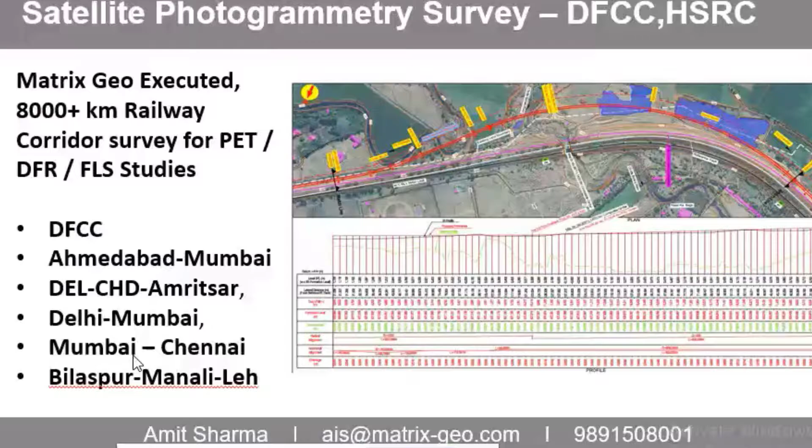And one very prestigious and very nice project, I personally like this project. This is from Bilaspur Manali Leh, in satellite photogrammetry survey. We have done almost all the corridors for high-speed railway projects, and apart from that, the Bilaspur Manali Leh project also we have done for satellite photogrammetry. So I will tell you briefly how we executed this project, because it was a prestigious and a very challenging project. It was done for Northern Railway.

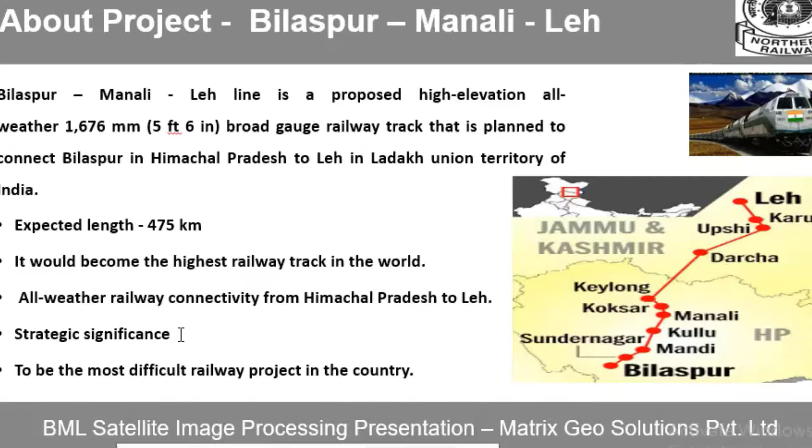About this project, the Bilaspur Manali Leh line is a proposed high elevation all-weather 1676 millimeter, 5 feet 6 inch broad gauge railway track planned to connect Bilaspur in Himachal Pradesh to Leh in Ladakh, Union Territory of India. The expected length was 475 kilometers. It would become the highest railway track in the world, with all-weather railway connectivity from Himachal Pradesh to Leh, strategic significance, and the most difficult railway project in the country.

So Bilaspur Manali Leh total area was 5,064.2 square kilometers. We processed the 480 square kilometer Upshi Leh section within only 15 days. The deliverables were orthophoto, DEM, and topographical map, and along with these outputs we gave an NSSDA report to prove the accuracy we committed and delivered, and we gave a delivery report along with that.

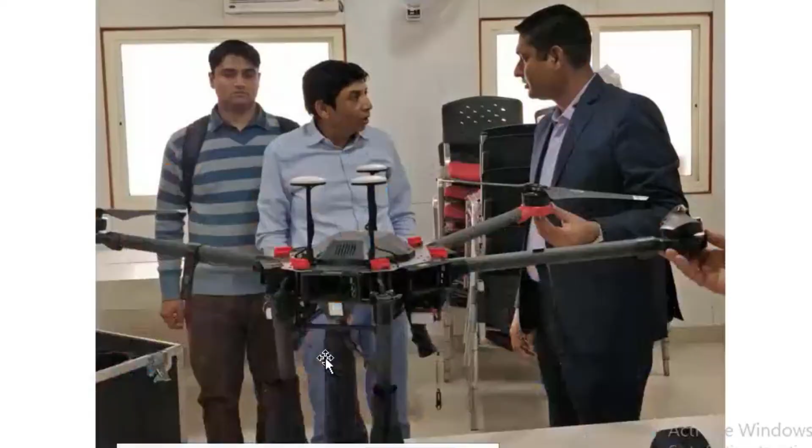So this was the project team. In this project, Northern Railway, a Turkish company, Yüksel, and Matrix Geo Solutions were part of it. They used to come to our office and were continuously monitoring the processing. This is the deputy chief engineer who was involved in that project. He was taking information on which drone we are using and how we use it. They closely monitored the processing of the data. So these were the stages: DEM creation using satellite imagery.

So the steps were, first step was input quality checking and inventory report preparation, in which we check the satellite imageries, whether they are fine or not. Do they have any cloud cover?

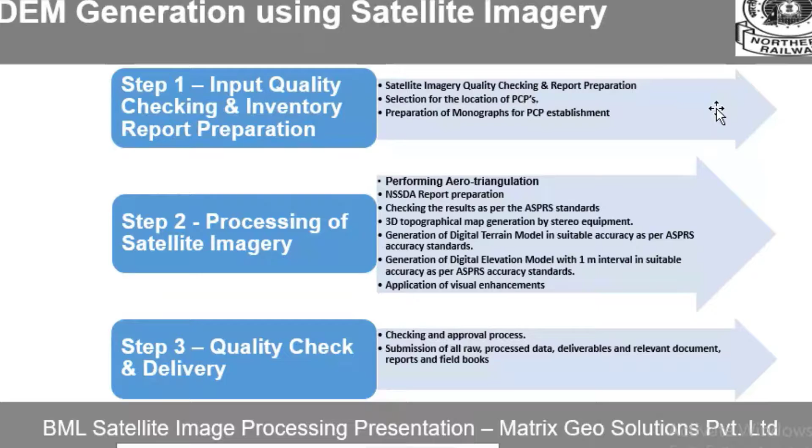So first input reception, that is receiving of image, then conversion of those images from TIL using IMD files provided along the images. Following parameters are checked: GSD and off nadir angle, type of satellite image, because there are various types of satellite images. The image required for this particular project was WorldView 2 and WorldView 3 image. So we need to check whether the images delivered to us are the same or not.

Then the time and date of images.

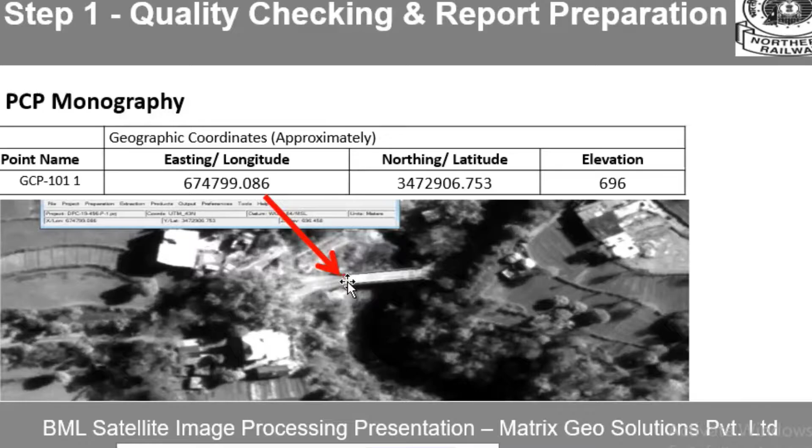Now, what is aerial triangulation? Aerial triangulation represents the mathematical process of establishing precise and accurate relationship between individual image and ground.

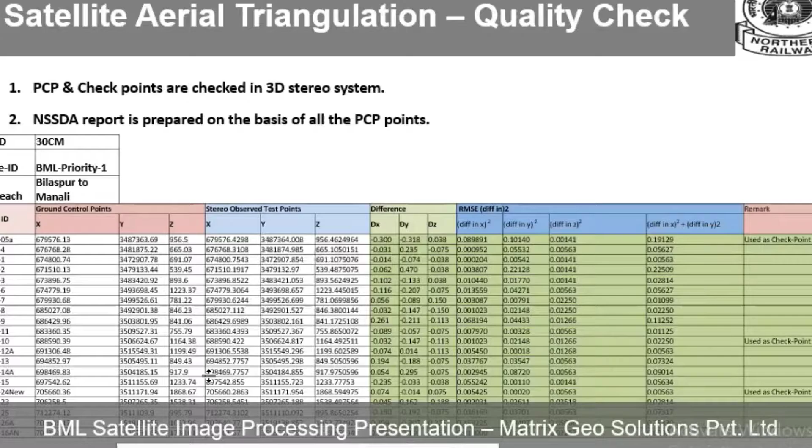This is a kind of a quality check NSSDA report which we prepare and give to client to show that the accuracy we committed, we are giving that accuracy only. This is also a NSSDA report.

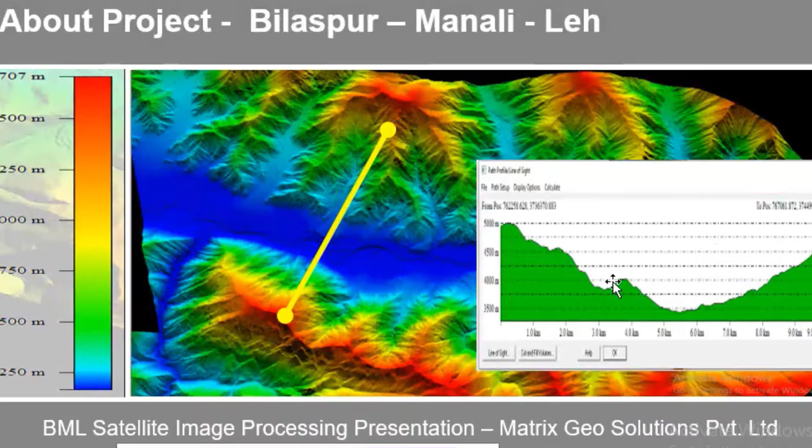नाउ डिजिटल टेरेन मॉडल का क्वालिटी चेक कैसे होता है? Principal control point and checkpoints values are compared with DTM points and reports are prepared. Manual and tool-based checks were performed to ensure accuracy of DTM as per specification. Quality statistics report in comparison to check and ground control points available. Manual check for accuracy and edge matching is done. This is the quality check report of digital elevation model.

Now this is orthophoto, the one which I told you that this is one of the major benefits of modern survey technology. You have in your background the image of your site, and that image is not just an image, it is a scaled map जो कि आप measure कर सकते हो in X and Y. You cannot measure the Z coordinate, the elevation from these images, but X and Y को बहुत ही precisely within

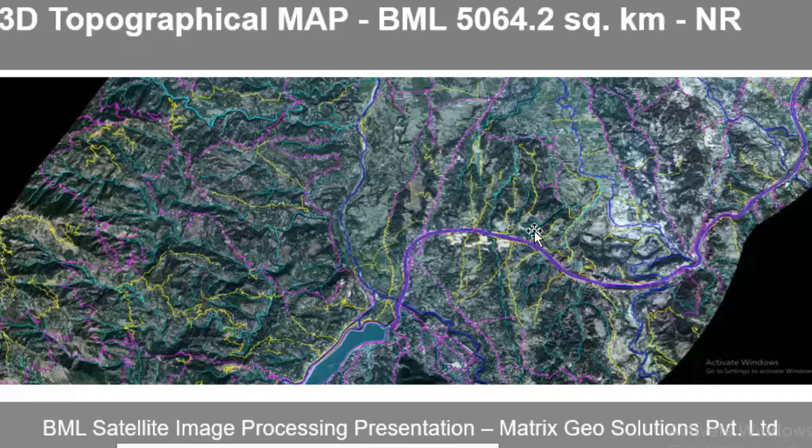The next thing is drone, which is widely used in railways these days. Now what is drone actually? It is an unmanned aerial vehicle which is commonly known as drone. It's a flying robot. It can carry camera, sensor, equipments, goods, humans as payload. It can be manual or software controlled.

Now coming to DGPS. DGPS is an integral part of modern survey technology which helps to achieve better accuracy. So DGPS is differential global positioning system. It is an enhancement to global positioning system. Provides improved location accuracy to 1 to 3 centimeter, whereas normal GPS provides 5 to 10 meter accuracy.

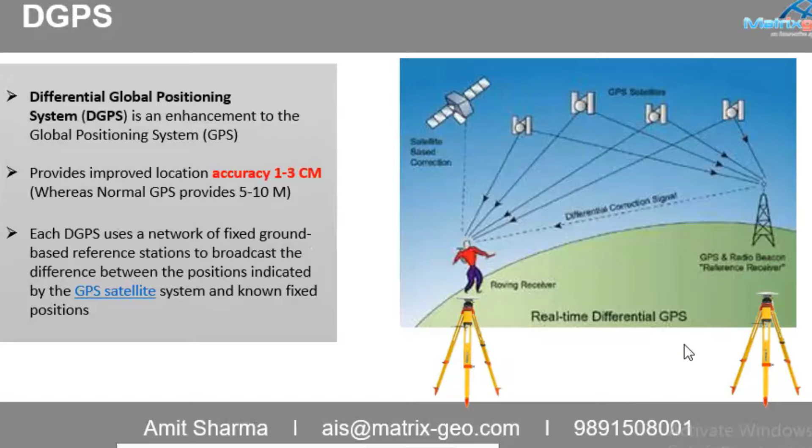DGPS uses a network of fixed ground-based reference stations to broadcast the difference between the positions indicated by the GPS satellite system and known fixed positions. This is a DGPS instrument. We have actually a drone with DGPS instrument integrated in it.

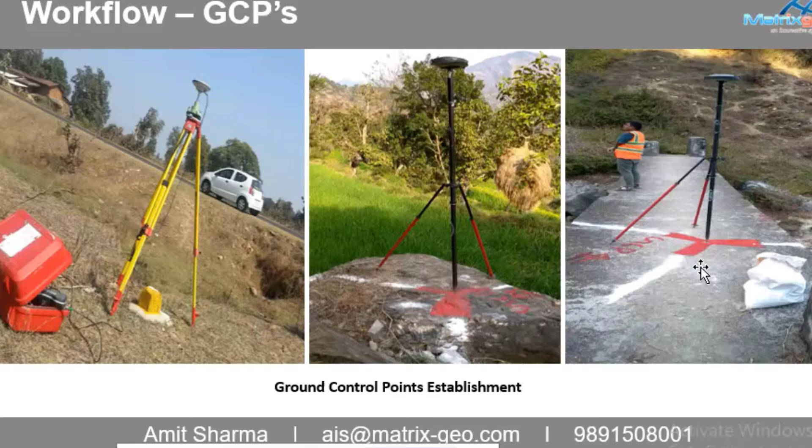After that, flight planning is done. Flight planning on image after site recce is done using special flight planning applications on laptops, considering important factors: flying height, the resolution of the image required, and the height of existing structures.

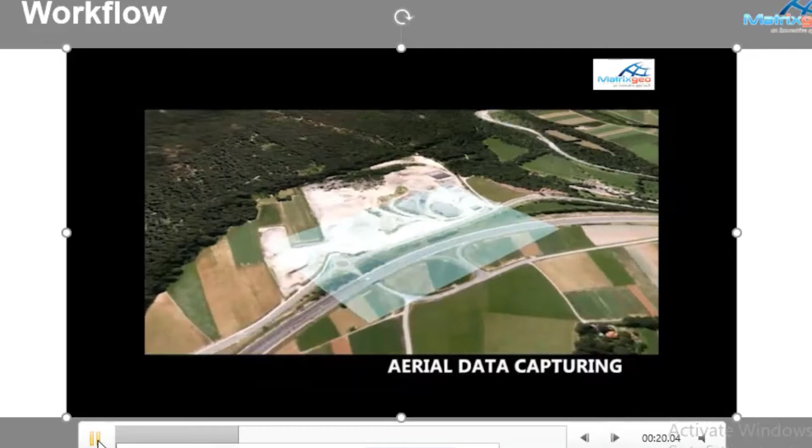This entire area is our area of interest, where flight planning has been done. Images are captured with overlap of 80% forward and 50 to 70% lateral. All images are captured, then they are taken to the system, and topographical data collection is done.

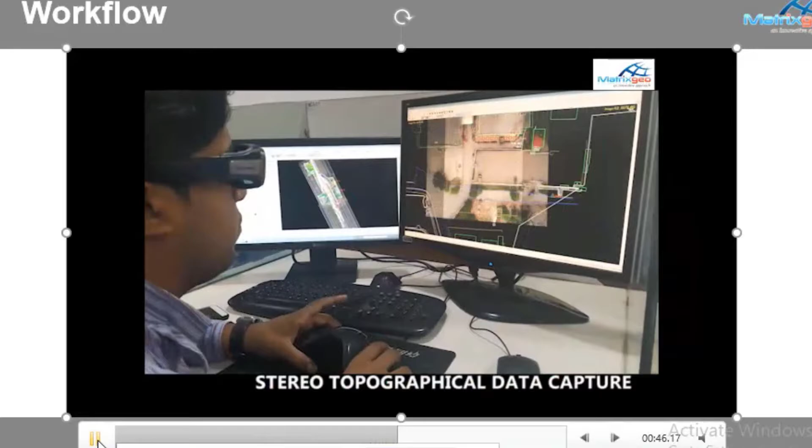You can see here the work is being done on 2 monitors. One is the 3D monitor. Then the digital elevation model is generated.

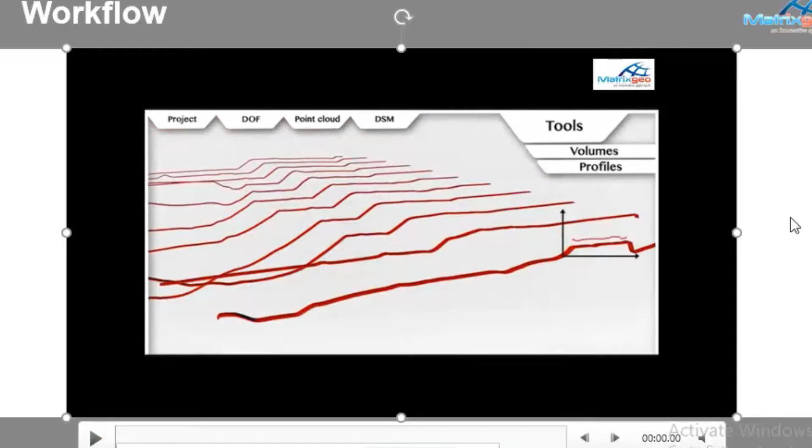Volumes can be calculated like this. Profiles can be calculated from this digital elevation model, and we can get an output. So this is what I was telling you about the stereo photogrammetry workstation.

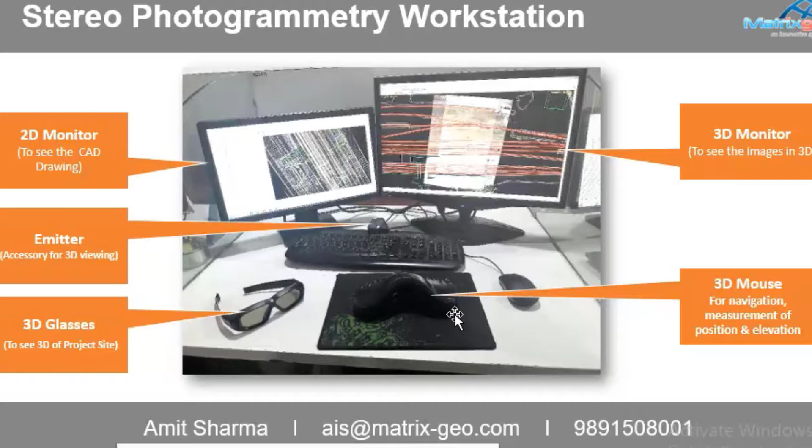It has 2 monitors. One is a 3D monitor, one is a 2D monitor to see drawing. On the 3D monitor you can have a 3D vision. This is an emitter with the help of which 3D vision is done, and this is the 3D glass. With the help of emitter and 3D glass, actually 3D vision is seen. This is a 3D mouse, a different kind of mouse having many buttons to perform various functions, so that work can be done speedily.

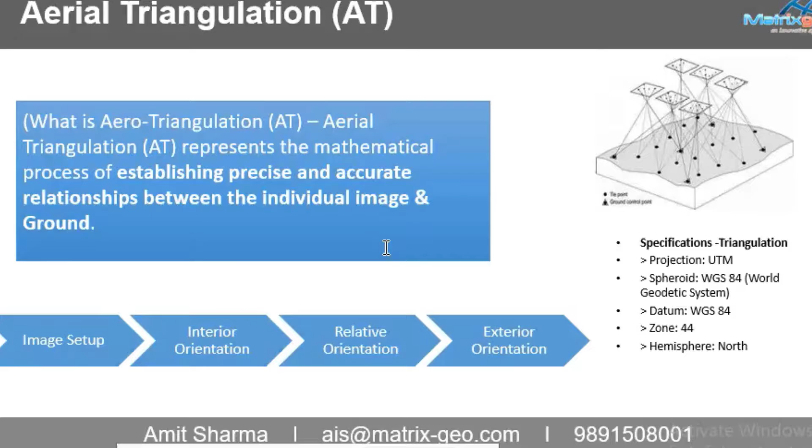Now this is the digital terrain model. It is a true digital representation of 3D terrain surface for engineering purpose. DTM is made of elevation points and abrupt changes marked by 3D break lines, representing elevation of surface. Fewer points can describe very flat or evenly sloping ground, and more points can be captured to describe very complicated terrain.

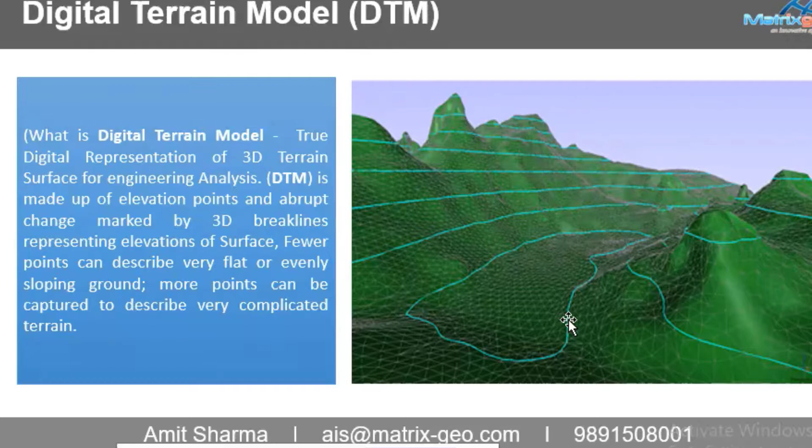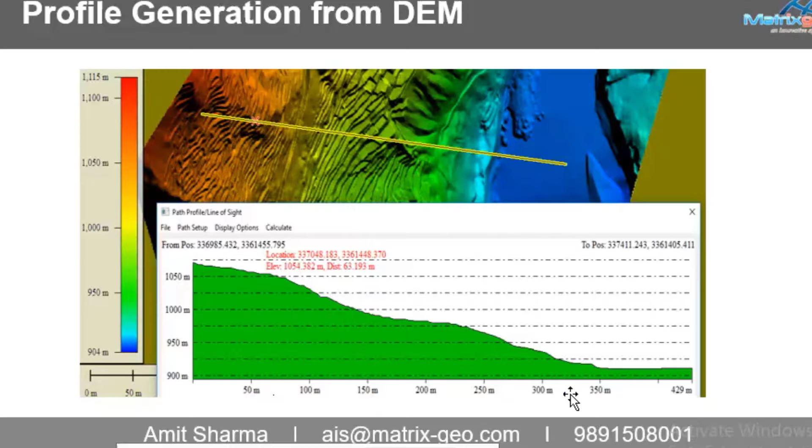Now orthophoto. Orthophoto is an aerial photograph that has been geometrically corrected by a photogrammetric process called orthorectification. Once an aerial photograph has been orthorectified, it is commonly referred to as an orthophoto. Advantages of an orthophoto: it is very high resolution visualization of the project site. An orthophoto can be used in GIS, CAD, engineering design software to measure true or real life distances, area, angle or features within the photograph.

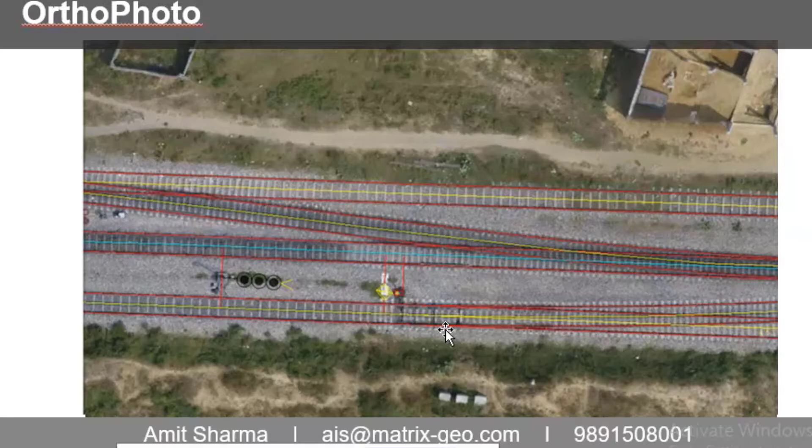अगर हम ये चेक करें कि कैमरा का सेंसर कैसा है, कितने रेजोल्यूशन की इमेज खींच सकता है, ड्रोन या जो भी एयरक्राफ्ट प्लेटफॉर्म आप यूज कर रहे हैं वो बहुत ज्यादा हिल तो नहीं रहा है, अगर हिल रहा है तो उसमें IMU यूनिट्स हैं कि नहीं, उसको कॉम्पनसेट करने के लिए DGPS इंटीग्रेटेड ड्रोन होगा तो वैसे ही उसकी इमेजेस की एक्यूरेसी बढ़ जाएगी।

जो ग्राउंड कंट्रोल पॉइंट्स हैं वो प्रोजेक्ट एरिया में इवनली डिस्ट्रीब्यूटेड होने चाहिए। ऐसा नहीं है कि 200 किलोमीटर का एरिया है और 2-4 किलोमीटर में ही वो GCPs केवल हमने मेजर कर लिए। इसी तरह जो एरियल ट्रायंगुलेशन है जो कि फर्स्ट स्टेप होता है किसी भी फोटोग्रामेट्री का, वो बहुत ही प्रिसाइज होना चाहिए।

उसकी चेकिंग होनी चाहिए एज पर ASPRS एंड NSSDA रिपोर्ट के बेसिस पे। जो डेटा कलेक्शन है बहुत से लोग करते हैं कि उसको ऑटोमेटिक मोड पे कर देते हैं, तो उससे उसकी एक्यूरेसी उतनी अचीव नहीं हो पाती है।

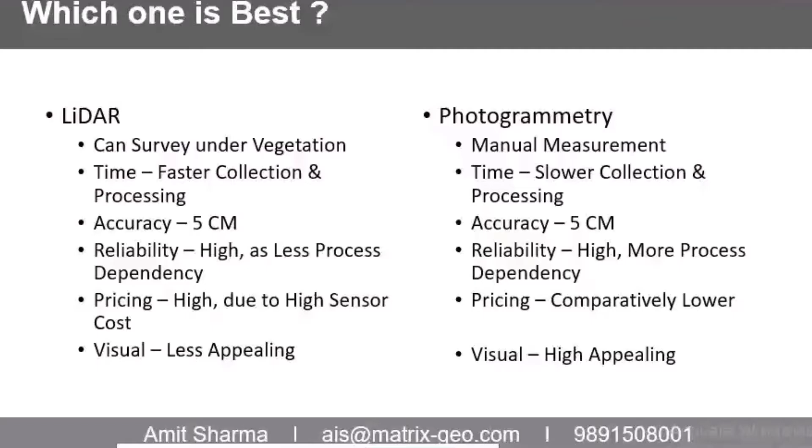So now LIDAR and photogrammetry we have completed. Moving ahead with what else can be done with photogrammetry, with the modern survey technology. Using this, digitalization of land maps can be done and they can be geo-referenced. We have so many issues with the revenue maps and the land maps. They are not in good shape or form, and not readily available. So if we can do their digitalization, they can be used very efficiently.

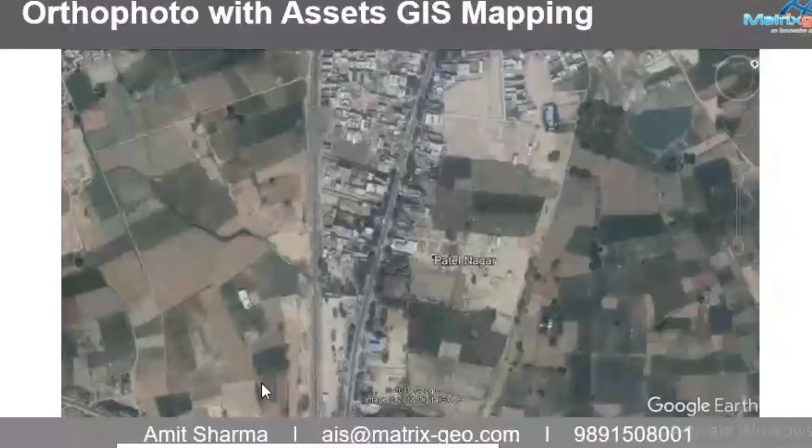Now we move ahead with the case studies. Orthophoto: it's 2 centimeter resolution information on the engineer's desktop for measurement. I've shown you this orthophoto. It says orthophoto with asset GIS mapping. With the help of this orthophoto, you can do asset mapping like this. These are various assets found on railway tracks, so they can be seen on the orthophoto and mapped accordingly.

Every asset has its lat long, chainage, elevation, everything. See, all the details are available with every asset. Now using aerial survey, this is a topographical survey for the DFCC Rewari Dadri project. It was a greenfield alignment. Corridor width was 120 meters and we had to do an engineering grade aerial survey.

That is why I'm saying that with the help of modern survey, you can have very accurate data and you can have proof of whether the data is accurate with the help of orthophoto. This is aerial survey for Roorkee Deoband in Northern Railway. This is the kind of data we produced. It was a 30-kilometer greenfield project. Activities we performed were control network establishment, aerial photogrammetry survey, old alignment validation and revision, developed L-section drawings and

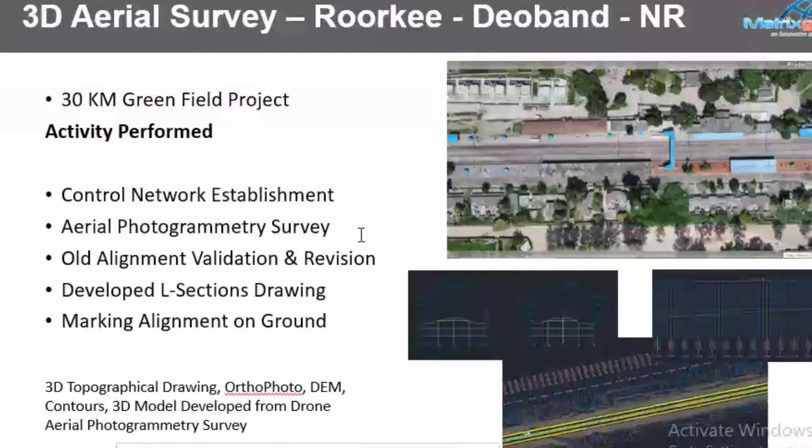59 bridges and portal station locations were there. Control network establishment, aerial photogrammetry survey, 3D topographical drawing with 5 centimeter accuracy was produced, orthophoto, DEM, 50 centimeter contours were given, and 4K resolution drone aerial photography and videography was also done for this area.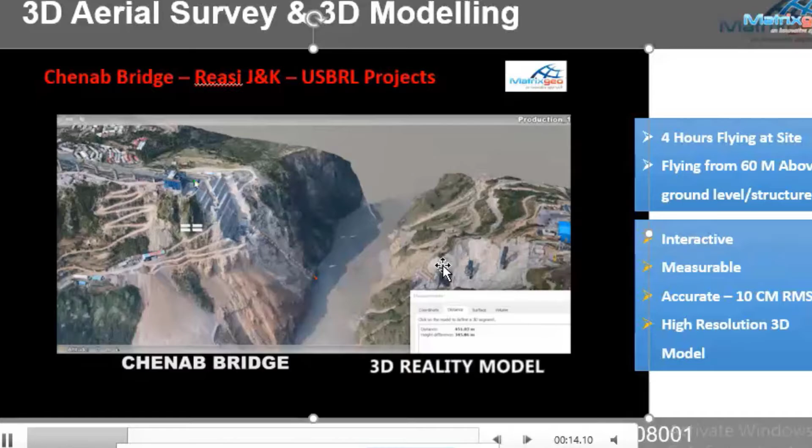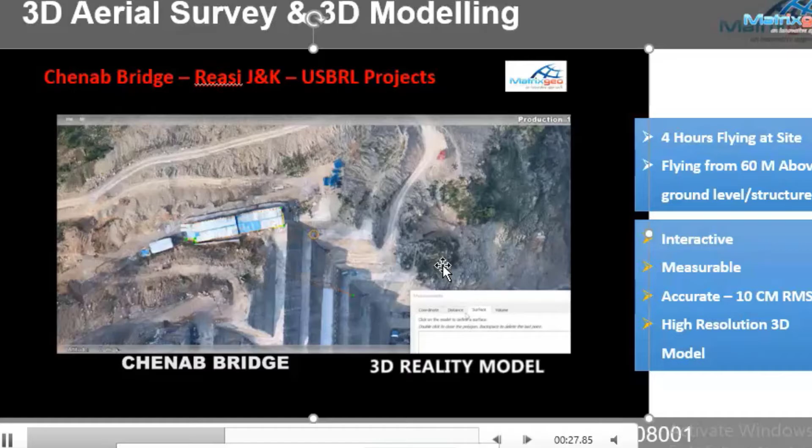So you can measure the distance from top to bottom. You can measure the perimeter and area of a building or any structure there. You can also do volumetric calculation.

So this is how volumetric calculation can be done. Just click some points and you can get the result here. It's a very easy task with this.

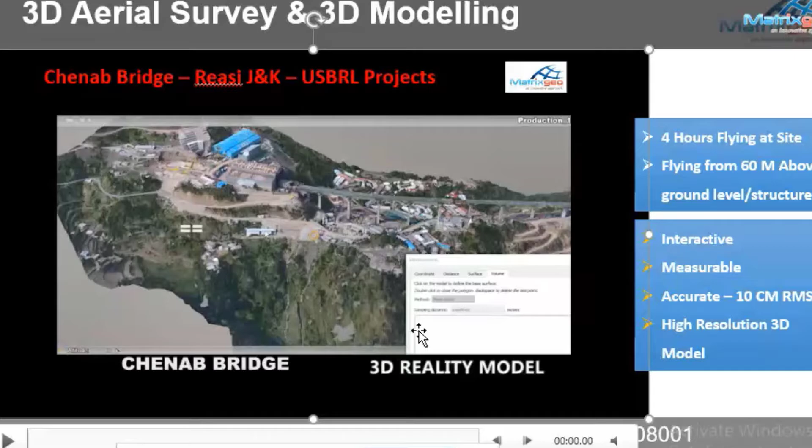So apart from these surveys, Matrix modern survey technology also includes river aerial survey and underwater survey. So upstream and downstream survey can be done. Riverbed elevation model can be made. Bank condition and watercourse studies can be done. Flood study and river modeling can be done.

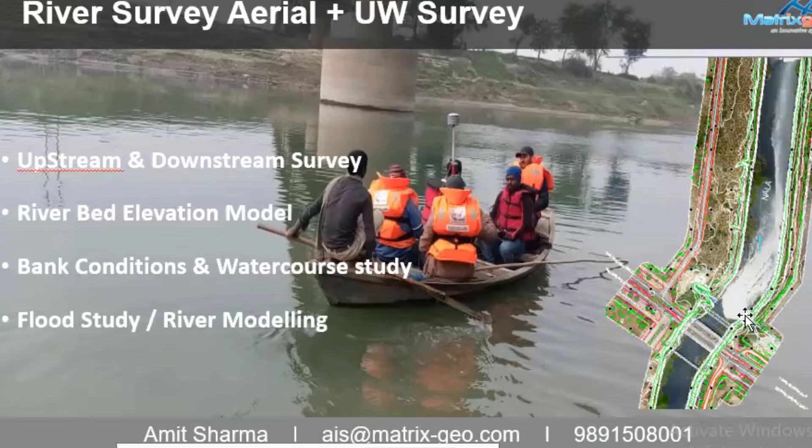You can see here, this is an image where Matrix Geo Solution conducted underwater survey and also aerial survey of the banks.

Another technology which comes under modern survey is Echo Sounder survey. Echo Sounder survey is used for river bed mapping because for anything inside water, sound waves do better than light rays. So instead of using a camera, we use the Echo Sounder. It is a type of sonar used to determine the depth of water by transmitting sound waves into water.

The time interval between emission and return of a pulse is recorded, which is used to determine the depth of water along with the speed of sound in water at the time. This is how the riverbed mapping is done at some specific intervals. The cross sections are generated and delivered to the clients. This is how a riverbed mapping looks like. This is our elevation model inside the river actually.

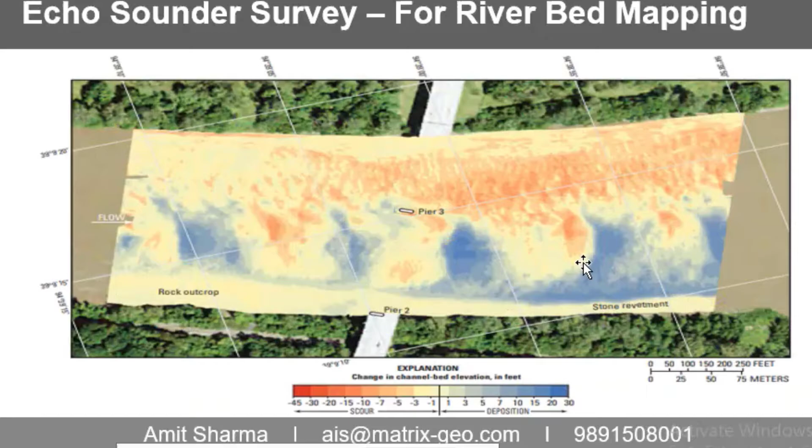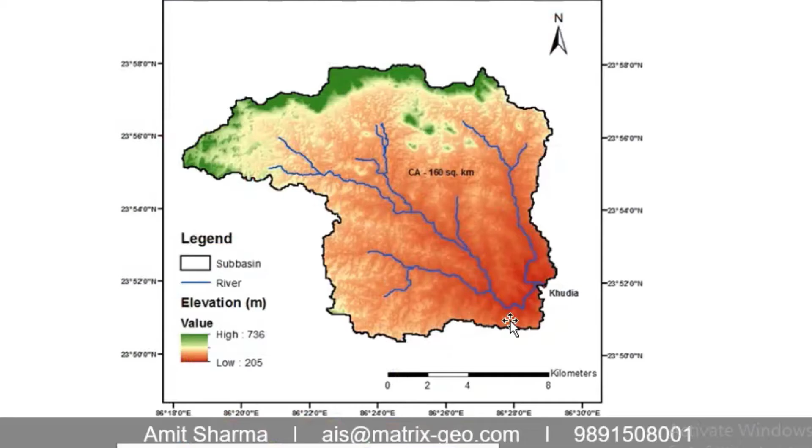This is how catchment analysis study can be done. Flood study can also be done using this. For this, we require some basic data like rainfall data from IMD, 25 year, 50 years, 100 years data, maximum rainfall data in 24 hours, catchment analysis can be done, drainage pattern analysis can be done, existing structures like dams, barrages, etc. We can show their connectivity and their effect on that particular area.

Land use and soil study can be done. Flood modeling and river modeling is done. We have done it for Kosi River and for Brahmaputra River. The results were really overwhelming, and the client really appreciated that and used that for their studies.

Then comes the yard survey. Yard is a very important feature for railways, and yard can also be surveyed using this technology. So the important output which we give for yard survey is a 3D reality model. It is an accurate mathematical representation of the world around the railway station in computer graphics, including the point cloud, surface triangles, and real texture of the features. These models are interactive and measurable.

Why is a 3D reality model needed? Because it provides realistic details and correct visualization of the site. 2D drawings need expertise and time to understand the site, whereas 3D models allow to understand the site faster, especially in complex urban environments. So the uses are, it helps in planning, visualization, and simulation.

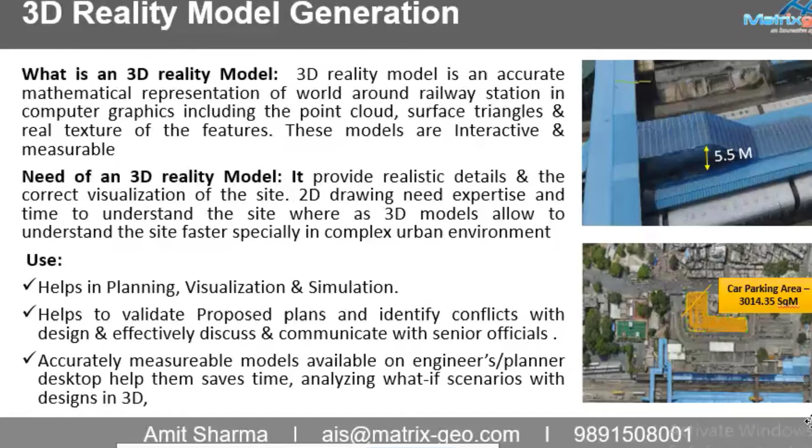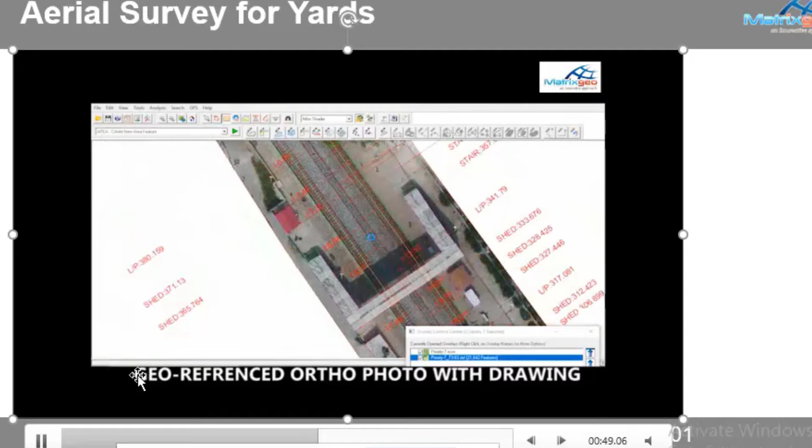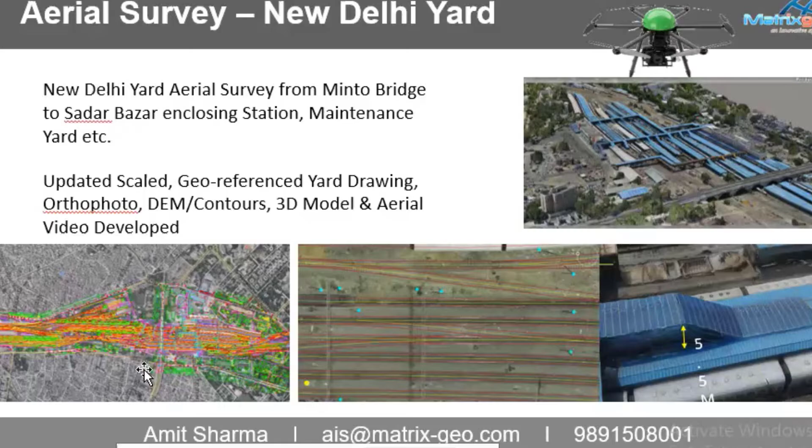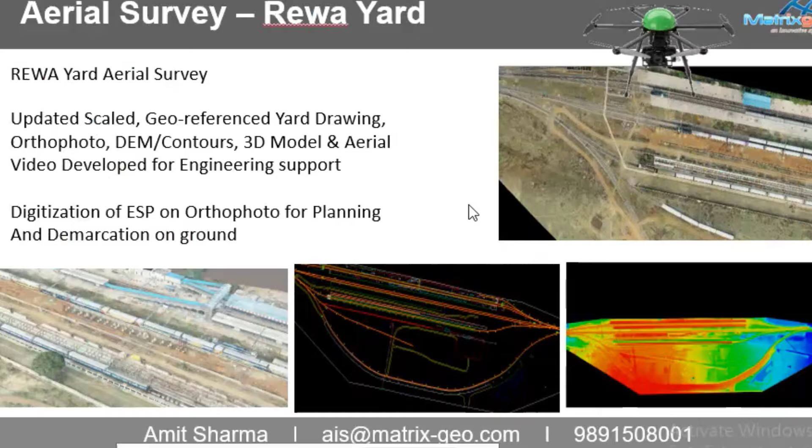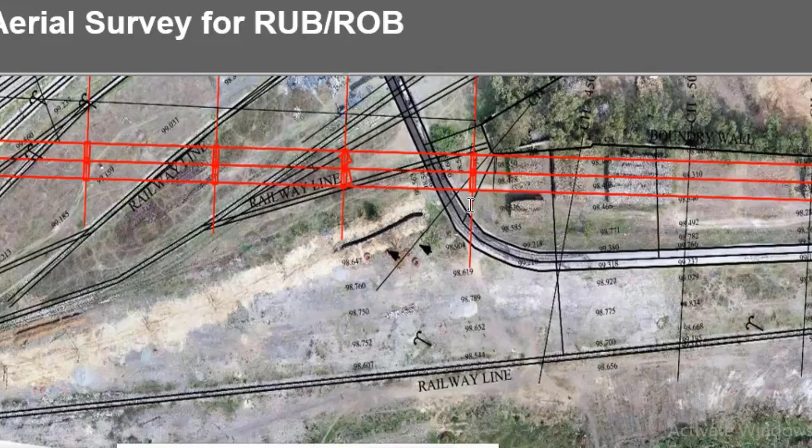And see. So advantages for aerial survey of ROB and RUB are aerial geo video for capturing overview around the manned rail crossing for understanding area, managerial appreciation and faster decision making. Faster topographical survey on the unmanned railway crossing and surrounding. Orthophoto is developed. Superimposition of drawing can be done.

3D reality model by drone is made. Cost-effective way to obtain information. Safety risks associated with traffic control and working in traffic are minimized using UAV. Periodic aerial geo video can help in progress monitoring of the under construction bridges also. So this is a classical example.

Actually, this slide should have been earlier, on what is the impact on quantity estimation if we use traditional survey and if we use aerial drone survey. Like here, in traditional field survey, points are taken at specific distances, right? And the differences of terrain, the differences of elevations like this, are neglected. So there is a huge difference in volumetric calculation.

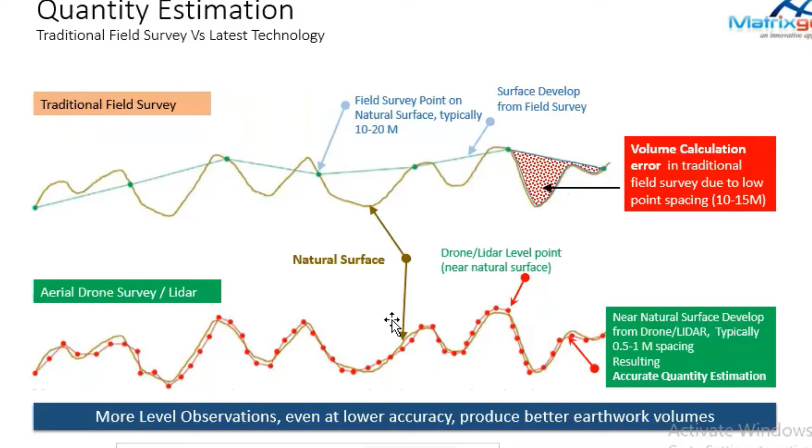While if you do survey using drone or lidar, you can have points so nearly placed that each and every nook and corner of the terrain is mapped, and so the volumetric calculations are done very precisely and efficiently. This is how quantity estimation can be done using modern survey technology. Now we are done with the topographical survey.

Another usage of drone is to capture video. So we will go into that. This is drone aerial video survey technology, geospatial video based rail network mapping and monitoring. Geo videos captured are very high resolution. Geospatial video using calibrated camera with metadata such as precise latitude and longitude and calibration value.

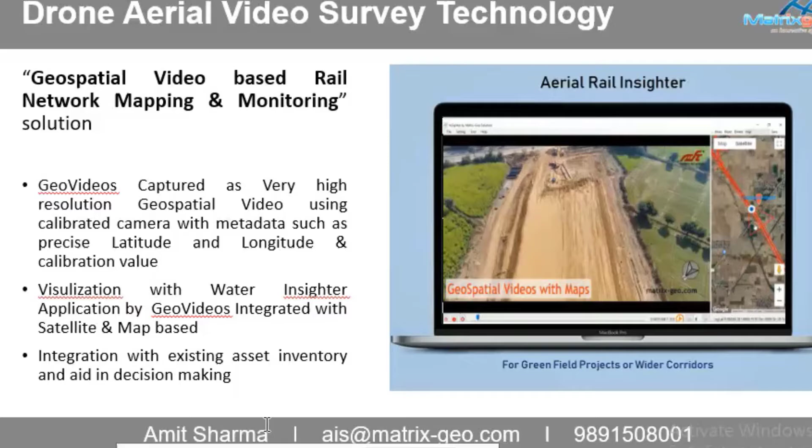Visualization with Rail Insighter, and application with geo videos integrated with satellite and map base. Integration with existing asset inventory and aid in decision making. So because time is less, I would like to show you a video on this. Video based monitoring can help in doubling projects.

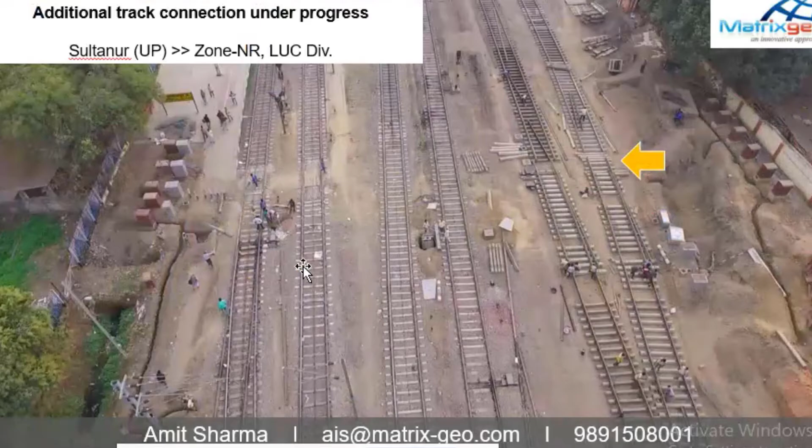See, you can see each and every stage of construction. You can see what is the stage of construction here using video. You can see there is misalignment of sleeper here, because the video captured is of such high resolution that each and every single feature is very easily identifiable and can be taken care of.

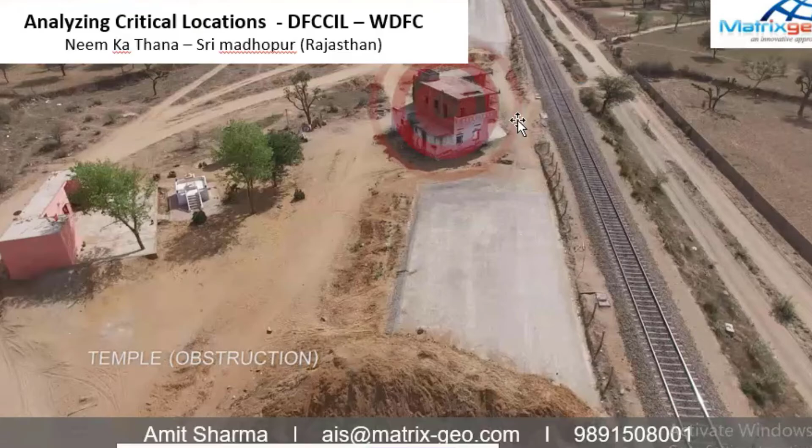Analyzing critical locations, like you see there's a building here and a work is already under progress, so you need to take care of this building, what should be done. So you can see everything on the video. This is another picture of how construction is going on. You can effectively handle land related issues.

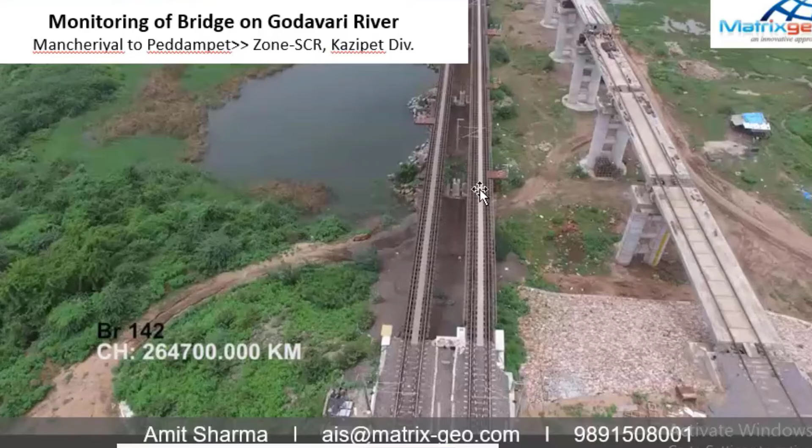This is a video from Neem Ka Thana to Sri Madhopur, and there were land related issues which were seen on the video and which can be easily eliminated. For effective planning of diversions, video monitoring is very useful. This is a small video which will tell you a lot about it.

Rail Insighter is a software which I told you about. It's customized software for railways. It solves a lot of problems which railway officials face. It is based on the feedback which we receive from railway officials, and we try to solve all those. Along with the video, you can have a satellite view so that you can see which location of the video is on your screen at the time.

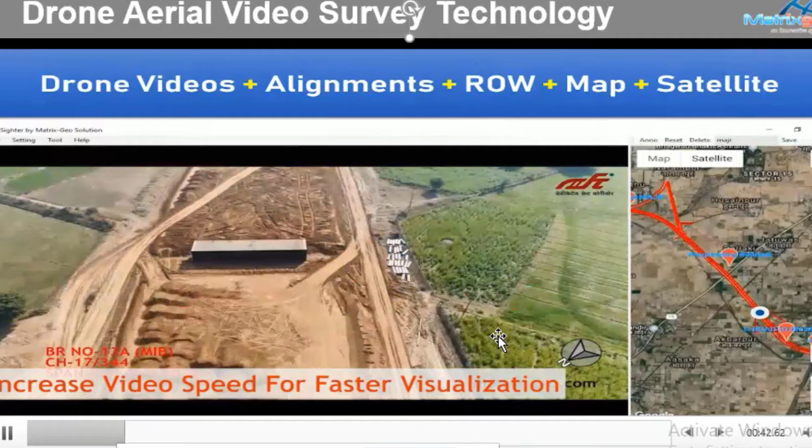You can increase and decrease the speed of video as per your requirement. If you want to have a recce survey, you can increase the speed. If you want to have a detailed look of the area, you can decrease the speed and have an enhanced look. You can mark annotations also here. You can mark observations along with coordinates.

Here annotation is marked. You can add it on the alignment itself and save it so that you can refer it to the person who is going to the ground. They can see and rectify those things. You can see your alignment on Google Earth so that you always have an idea of which location the video is at.

A very important feature of this software is that you can compare two videos at a time. The bottom video is during the construction stage, and the above video is when the construction has been done.

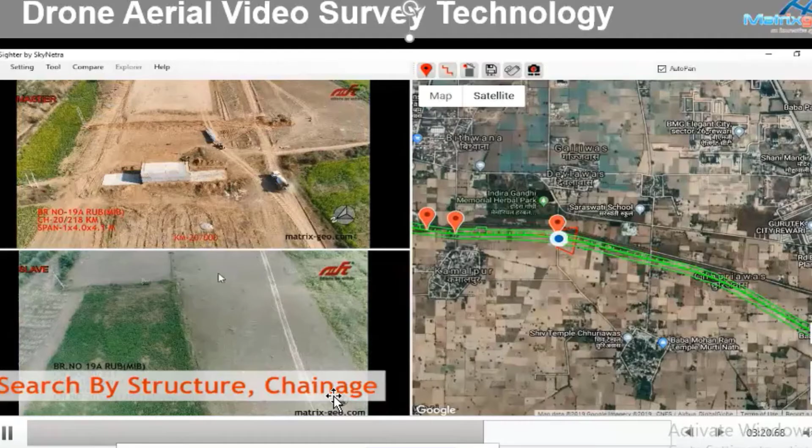So you can compare the construction stages. You can compare in 3 months time or 1 month time what progress has been done in the project. You can search the structures also using the chainage. We actually integrate all the annotations on the video and just name the structure and you can search it. You don't need to pan the whole video to go to a particular location.

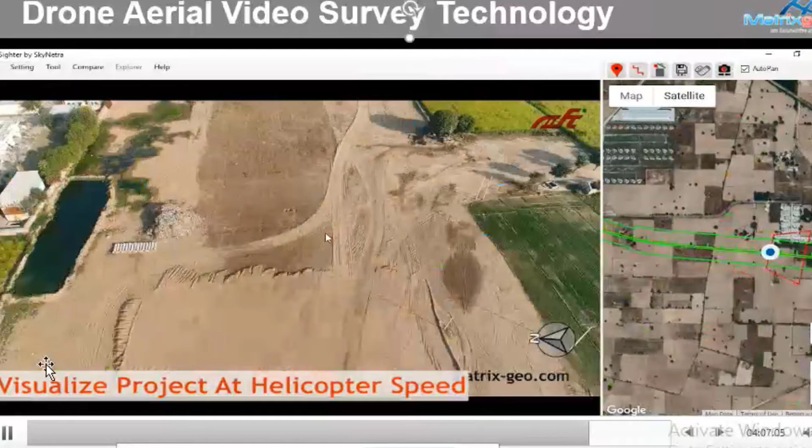You can see the annotations here. See, in red color annotations are coming. Bridge number, LOC number, LC number, FOB number, everything. We incorporate all the things and you can easily see here. Bridge number, chainage. So this was about aerial video. These are some photos captured from the video.

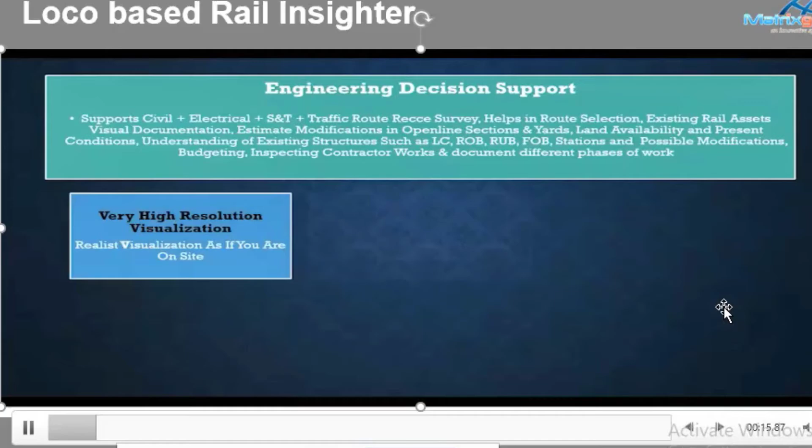Now that was done from drone. That was a kind of aerial survey. Another kind of video can be taken from loco based survey. That is, we mount the camera in front of the loco and you can have a closely viewed video from there. This is also a video showing loco based Rail Insighter benefits. It helps in engineering decision support. It is very high resolution visualization, enhances situational awareness.

It's time saving. You can see the previous video were taken from a drone, so they were giving you the aerial view, while this video is giving you a front view of the railway track and a more closer view, so that you can even see the things written on your junction boxes or on your light posts also. So this is basically done for asset inventory. Existing railway structures can be mapped, electrical structures, asset reviews, or everything can be seen and taken care of.

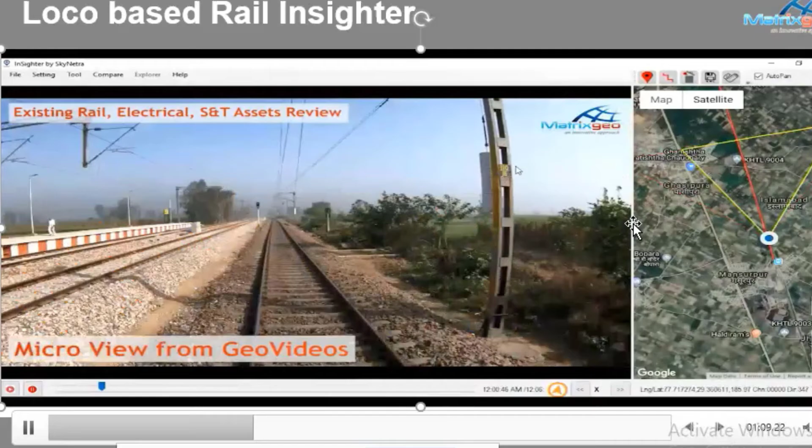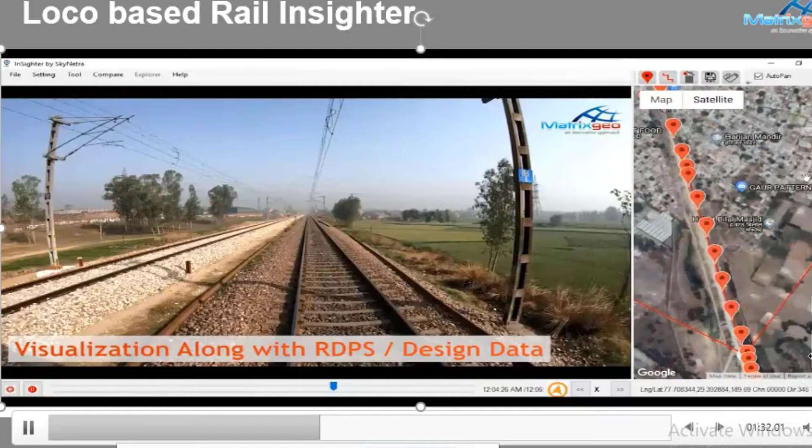In this also, because it is also run on Rail Insighter software, it is synced with map and you can always view the location of the video running on your screen. It also has the same benefit like that we have seen in drone video. You can have the list of the assets. You can search the assets. You can compare two videos. Everything can be done here. You can visualize the LC locations very closely and you can see what are the problems and what solution you can give to them.

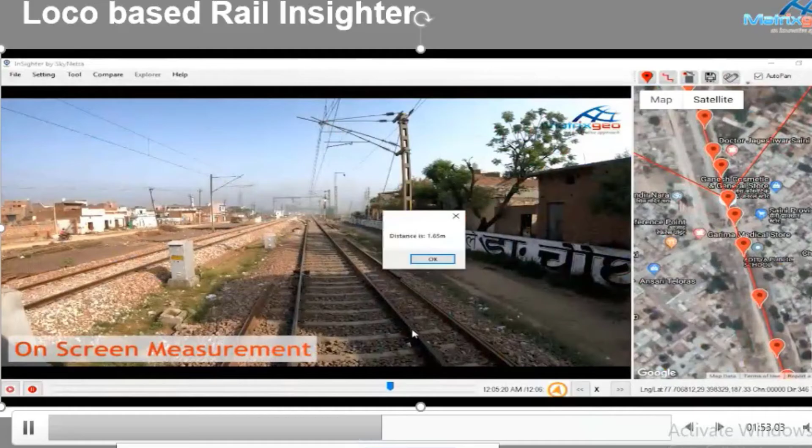The major benefit is you can always do these things. You've been doing these things since long, but now this is very comfortable that with the help of this video, decreasing your site visits, you can just view it on your system, and many people can view it together. Many people can have the same video, view it, and take decisions on the same.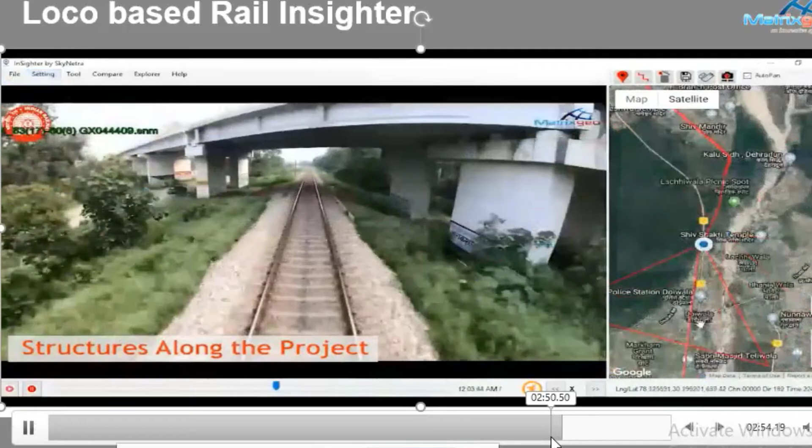You can increase and decrease the speed of the video. You can zoom in and zoom out, and you can also measure the video. Measure the distances, the XY distances, of course, not the elevation. So this was about loco based survey. This is Rail Insighter video for Dehradun Haridwar doubling project.

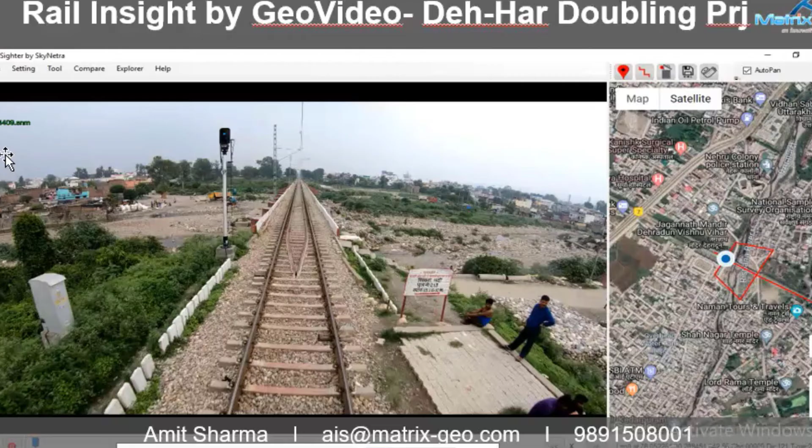Now, like I told you, modern survey technology is also used for OHE design and projects, for electrification projects to achieve aggressive railway electrification targets. It can be done very fast and it can be done very accurately, minimizing the site visits. We have done it for Mathura Kalyanpur for 407 TKM. Its scale as-built drawing is developed, soil profile is developed. It replaced foot-to-foot survey. Pegging plans were developed. These are the outputs which we delivered.

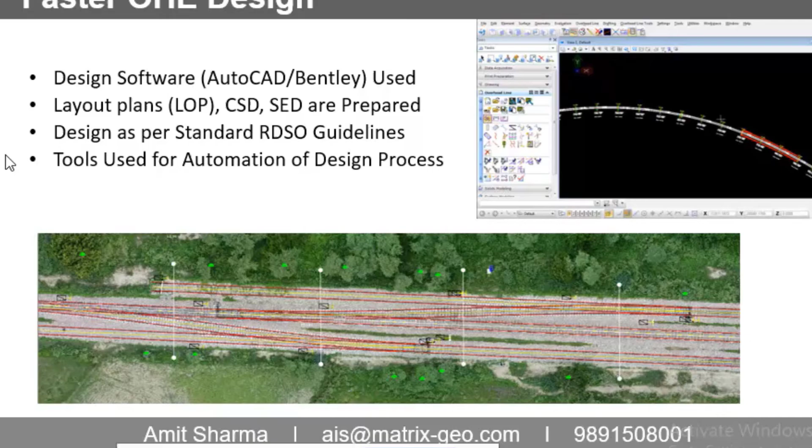Design software, AutoCAD was used, layout plans, CSD, SED were prepared, design as per standard RDSO guidelines was done, and tools were used for automation of the design process so that it can be done fast. So advantages of aerial survey in design: reliability is increased. It is time saving because the iterative process of site visit during design, checking and approval of design at IRCON and validation of design on ground has reduced. It enabled quick decision making and automation of design process with the help of softwares, which decreased the time and increased the accuracy.

So this modern survey technology can also be used for the monitoring and inspection of old bridges. There are some locations in the bridges which are really hard to reach, and since very long conventional technology is being used, which I cannot say is not effective, but yes, it was time consuming, and because it was dependent on the skills of the engineer or of the person who is using it, it was not that reliable.

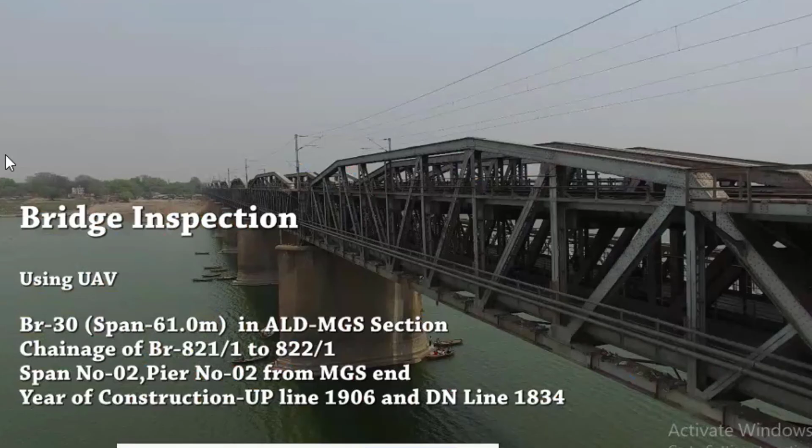With the help of drones, you can go to the places which are hard to reach and you can get the data. These are the locations of the bridges. You can see each rivet here. You can see these locations which are really inaccessible. A man cannot go there. You can see the downside of the bridge also. You can see that rusting is there. You can identify the concerns and then you can rectify it on time.

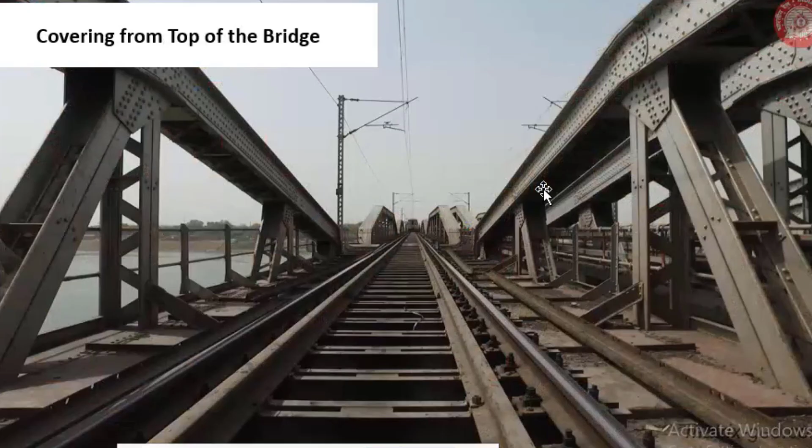The image from top of the bridge. Other technical services which can be done using modern survey are the ground penetrating radar. It is helpful to identify the utilities. GPR technique employs radio waves. Like I told you, in echo sounder, sound waves are used, which was used for riverbed mapping. Similarly, in GPR technology, radio waves are used to detect the things underground.

Typically in 1 to 1000 megahertz frequency range to map structures and features buried in the ground. Ground penetrating radar works by emitting a pulse into the ground and recording the echoes that result from subsurface objects. This is a helpful technology to detect your underground utilities. This is how a GPR works.

So the way forward using modern survey technology for construction projects: you can use it for drone-based aerial recce survey, which can be video-based. Adoption of engineering-grade aerial topographical survey with geographical coordinates for doubling, new lines and RE projects. Adoption of drone LiDAR for greenfield rail alignments. Adoption of trolley LiDAR for doubling, RE, GC projects.

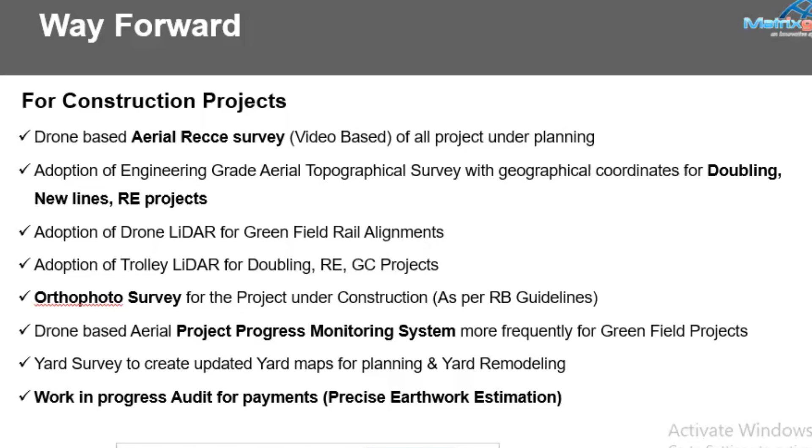Orthophoto survey for projects under construction. Drone-based aerial project progress monitoring system more frequently for greenfield projects. Yard survey to create updated yard maps for planning and yard remodeling. Work in progress audit for payments, because we can have a precise earthwork estimation using this.

In Indian Railways, planning stages: aerial recce for proposed alignment, aerial topographical survey, greenfield alignments or doubling projects, aerial survey of critical under construction project site, aerial survey for OHE design projects. Similarly, for monitoring: progress monitoring by aerial videography of under construction projects, survey of critical under construction project site, loco-mounted geo-video for quick monitoring of doubling projects.

For existing networks, it can be useful for on-track, off-track GIS mapping by orthophoto and GPS, land mapping and precise encroachment identification, yard remodeling or station development project, visual inspection of bridges or critical assets in inaccessible areas. These days, railway is widely using drones for the yearly monitoring of bridges. So DGPS integrated drone-based photogrammetry survey. These are some way forwards for the technology.

Drone LiDAR survey for precise topographical survey in heavily vegetated areas. Loco-based LiDAR survey for doubling projects. Geospatial drone aerial video and Insighter application for greenfield projects. Loco-mounted track-level geo-videos with Rail Insighter application. High-resolution satellite-based survey for high altitude or inaccessible areas.